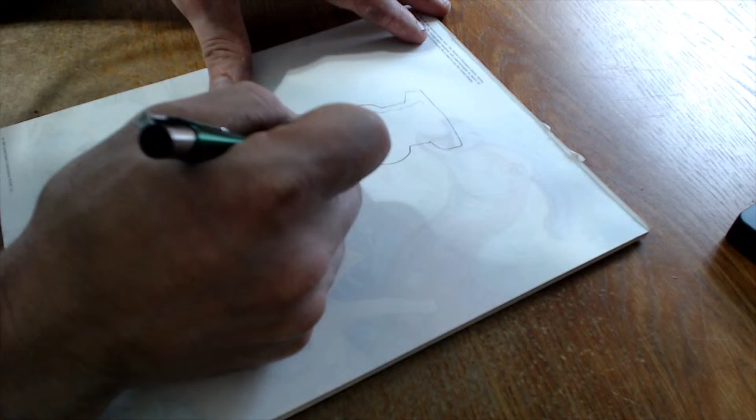And I actually had this idea of doing, let me just get this drawn, kind of a Matryoshka doll, a nesting doll of chess pieces, where we would create hollow pieces and then stick them inside of each other. And you'd take them apart, separate them in the middle, take the next piece out, separate it in the middle, take the next piece out. I thought that was an interesting idea. The problem is, there's a couple problems. One, I wasn't too confident in getting any good detail.

It's actually not that difficult to do regular chess pieces, with the exception of the horsey. There's my horsey. With the exception of the horsey, a lot of chess pieces can be made on a lathe, which means that they have symmetrical designs, generally speaking, which makes it very easy to do in Fusion, symmetrical and reasonably geometric designs. So most of the pieces, with the exception of the horsey, would not be too difficult to design in Fusion.

But I was thinking about printing it, because printing it is kind of important. And printing this nesting doll thing becomes extremely complicated, because your tolerances need to be really good in order to fit pieces inside of pieces. Like, if we're printing to scale, let's say this is a rook.

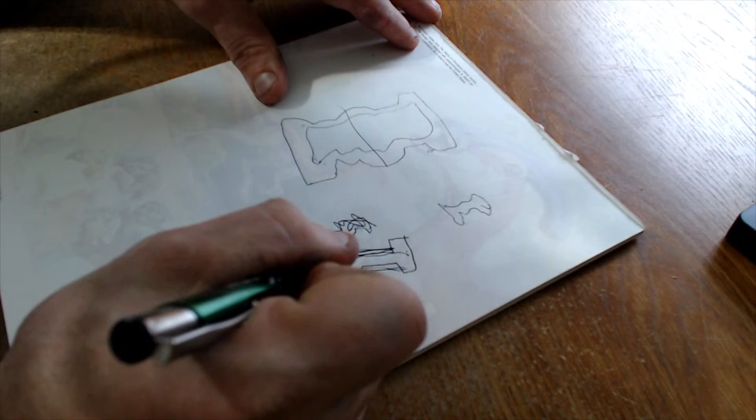Basically to scale, maybe a little bit wider here. So this is a little bit wider here. So if this is to scale, printing a bishop, let's say, inside of this, you see how much smaller that bishop to scale all of a sudden is in order to fit inside of the rook. So that's my biggest problem, and the reason I didn't end up going with this.

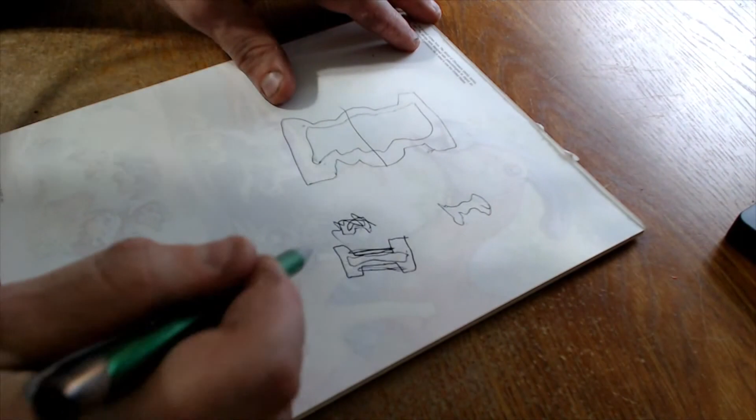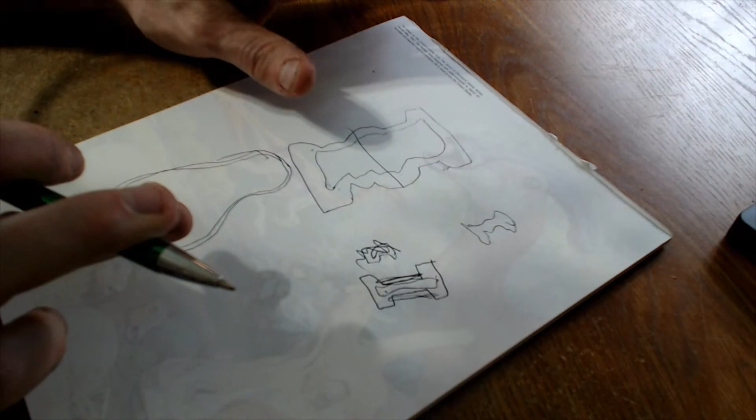The alternative that I thought about for a little while is actually making normal nesting dolls, to scale, starting about this big, and then because all the nesting dolls are the same exact shape, we don't lose as much space as over here, and therefore it becomes a lot more feasible. And because they're the same shape, we also have a lot easier time with the tolerances.

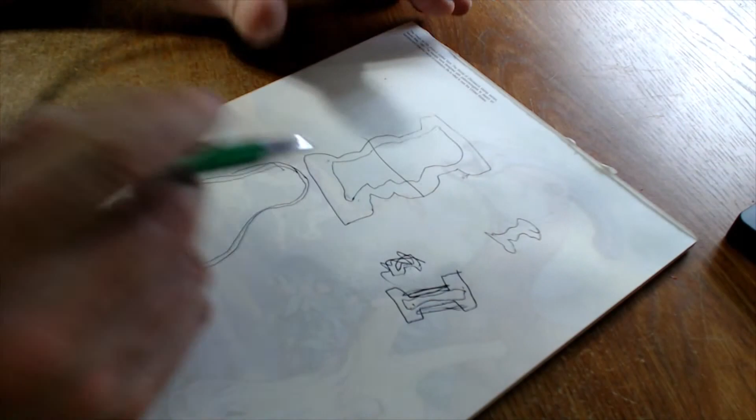So if we went ahead with a standard nesting doll shape and then just found some Creative Commons art, fantasy art, let's say, to inlay on here, extract the vector, put the vector into Fusion, and then extrude the vector, either embossed or engraved. Doing that in Fusion would be relatively straightforward, but it's also extremely boring, frankly.

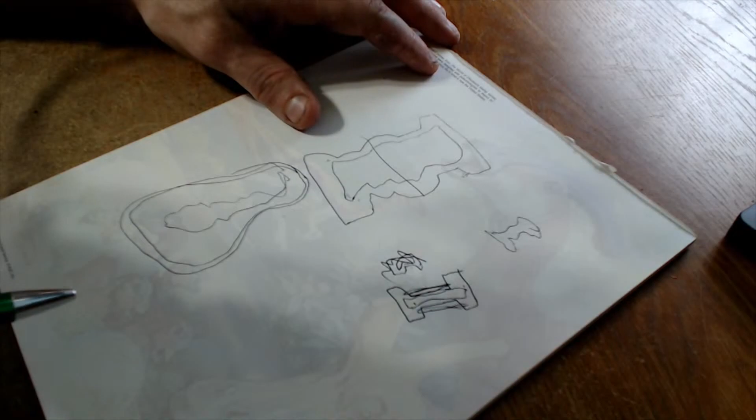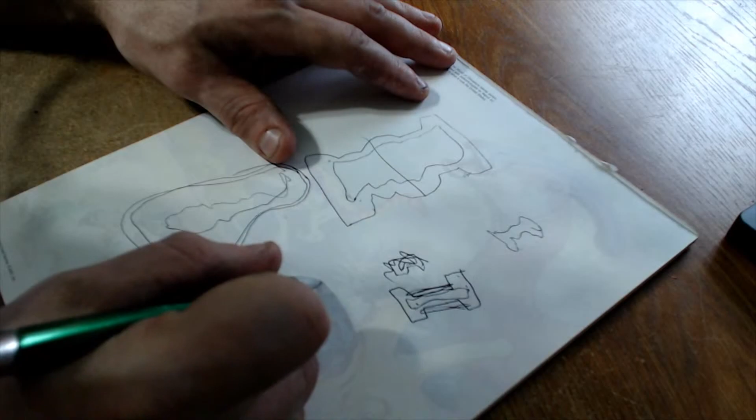I wasn't very happy with that idea, which brought us on to the next idea: if we don't think we're going to be able to nesting doll these, then, and this is my current idea, but I'm going to have to work it out, it's going to be a little difficult, instead of nesting them, having them pieced together so that our rook piece might intersect with the bishop piece, and the negative space in here might fit the horse, etc. So that's the general idea I think we're going with right now.

Again, trying to make something that stands out, that has some additional draw to it beyond just being chess pieces, because chess pieces in general, there's a ton of them out there. You've probably seen a ton of different styles of chess pieces. I don't like this mindset of we're at a disadvantage because of what we're trying to do. I'm not going to be terribly worried that people have seen chess pieces 1.5 million times before.

I'm going to be more worried about making something cool that actually works, because I've been on this puzzle box kick recently with the mechanical deck box, which is probably where this is influenced from. This idea of having interlocking pieces that come apart and go together in a specific pattern has been a theme in my mind for the past couple of months. I think having everything fit together in this pretty formation is an interesting idea.

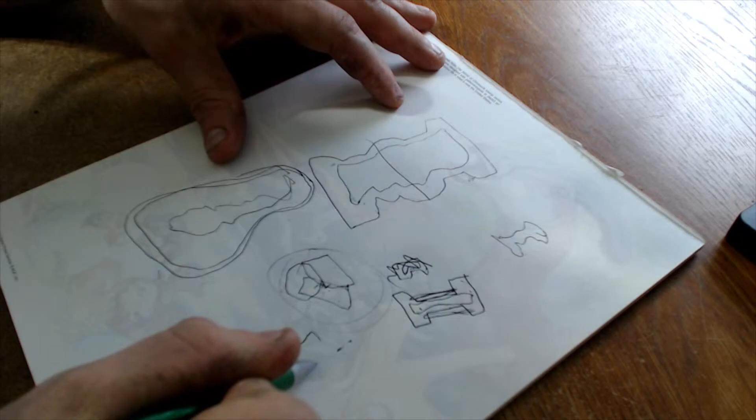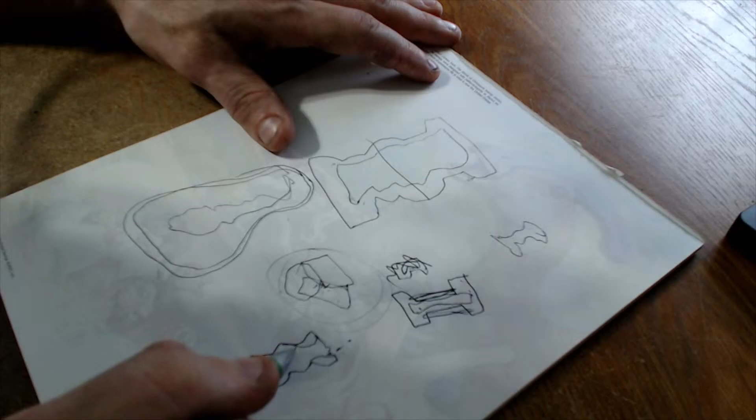Heck, if this design even gets to a point where the final form of all the pieces put together for a side is a king, that would actually be really cool. The horse is here, bishop here, rook here, etc. If the final form actually has some kind of significance to it, that would be really nice. I'm not holding my breath, but I definitely think we could at the very least have everything pieced together and, I don't want to use the term, market it as a travel set.

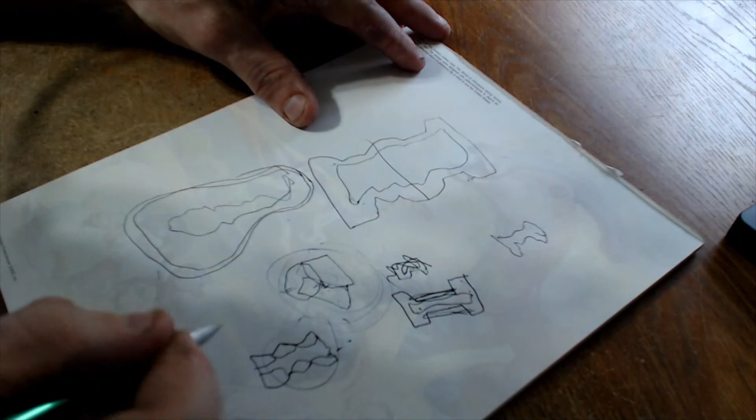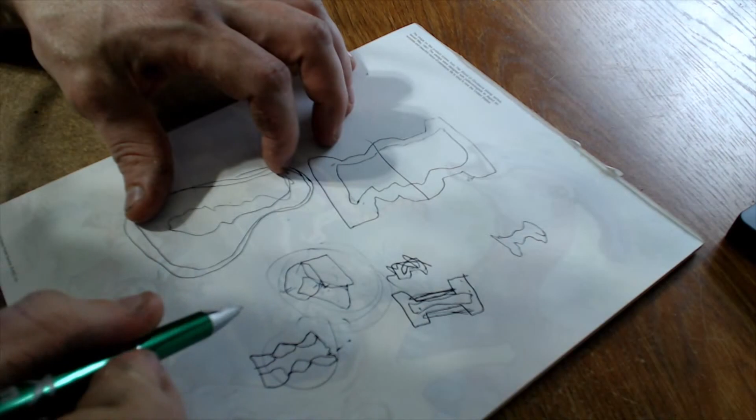The other thing I've been thinking about this morning before we went live is, because I'm doing a stylistically geometric polygonal shape, is there anything else I want to add? And I think it would be neat. If we assume for right now that all our bases are going to be square, I know bases are normally round, but round bases are significantly more difficult to fit together into combined shapes, so I'm starting out with square. Maybe we end up with hexagonal.

Let's say we have the rook here. Chess pieces generally have a base, an intermediate part and then a crown. Even the horse, the head is kind of the crown, a large bulbous thing on top. So since all chess pieces have this general geometry, if we can incorporate the piece's movement into that design in an interesting way, that would be very interesting to me. So the rook would be something along this shape. The bishop would have features that go diagonally towards the corners.

One of those things, just brainstorming here on the fly - the horse could be, maybe I'll overlap some shapes here, this kind of Y shape in all directions. I guess this ends up being more octagonal, right? 1, 2, 3, 4, 5, 6, and 6 is 12. So actually dodecahedral, or not dodecahedral, that's 20. I'm blanking on the shape of the 12-sided one.

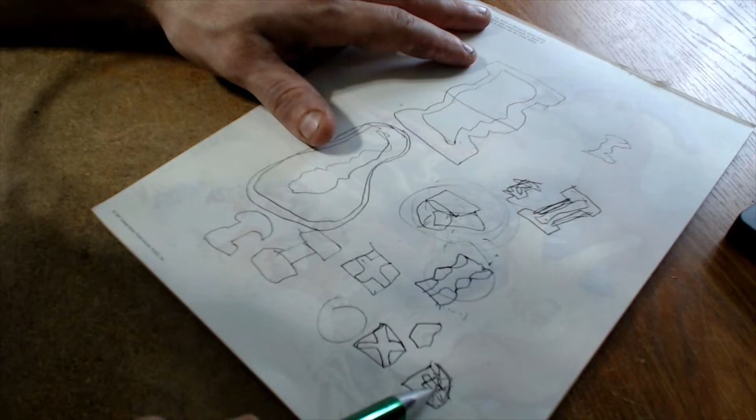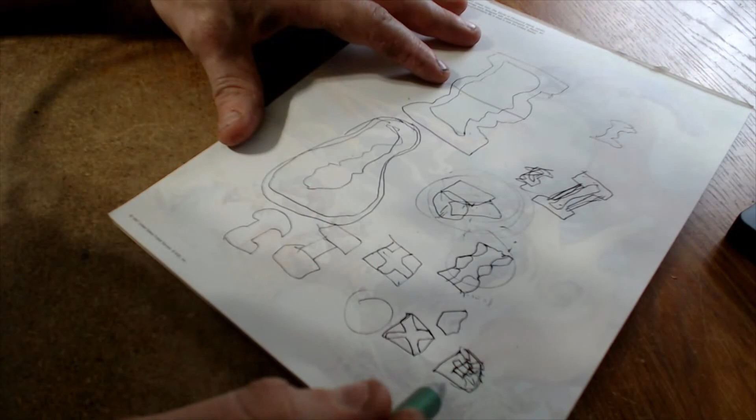That wasn't on screen, was it? We're over here for the record, sorry about that. So anyway, making a Y shape repeated circularly in order to get the horse's thing - that's one of those things I'm thinking we're going to go with. How it actually turns out, I guess we'll find out.

Let's go ahead and hop into Fusion.

Fusion, okie dokies. Haven't even saved the file yet.

Actually, yeah, I'm going to switch back to camera really quick. I know you guys see my file structure over here on the side all the time, but I'm still a little funny about that. So let's see - new project, chess pieces.

Let's start with - well, it's interesting because how exactly to save this as a file is another interesting question. I'm going to start with chess piece as a file, and we'll see what happens.

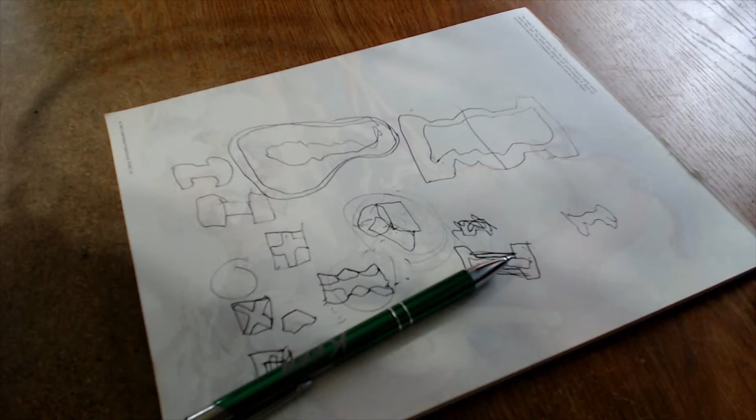Alright, so welcome back to Fusion. Grab some coffee.

Alright, so again, the general idea here is to use a square base. The reason we're using a square base instead of a circular base is because circles don't stick together as well. This base may end up being a hex - I don't know, we'll figure that out when we get there.

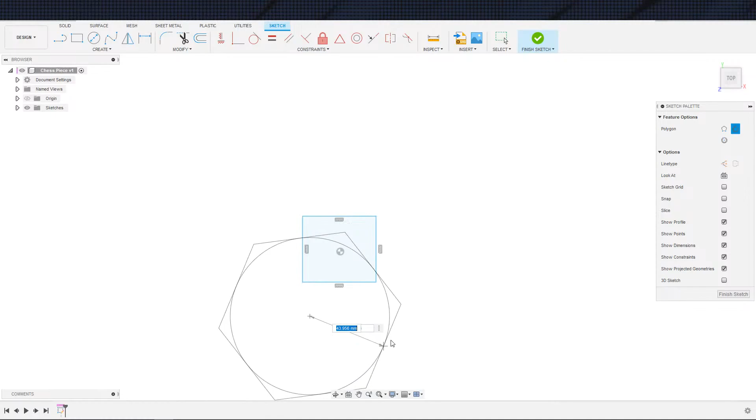One of those things that'll just take a little bit more thought to get there. So I'm going to rough out a chess shape here, and then we'll see what we end up with. Again, that's the point of these design streams - I'm just going to randomly throw stuff together and see where we end up.

And by randomly, I mean in a very skillful and organized manner, reflecting years of design and professionality. Yep, exactly. Let me open up the browser window really quick because I'm curious whether chessboards are generally 1-inch square cells. Let's see what this link says. Okay, so this one has a list of sizes starting at 1-inch square and going up to 2 3/4 inch square, basing that off the height of the king piece.

Let me mute my phone really quick. Alright, mute phone, mute. Everything, mute everything. There we go. Alright.

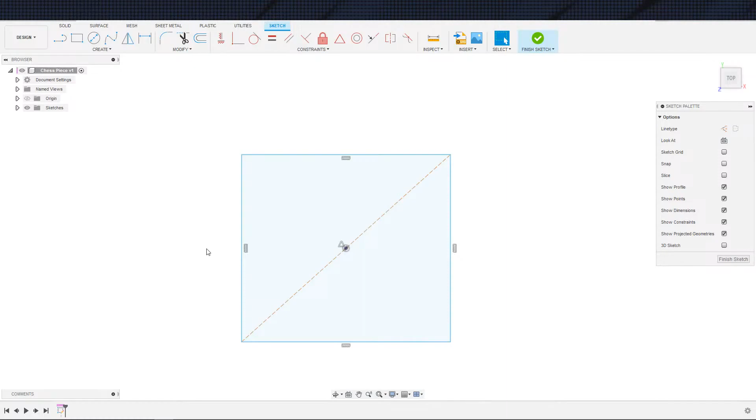So 25% less than - well, I'll just do 0.75 inch. Actually, base size equals 0.75 inch. There we go, and I will make this equal for right now.

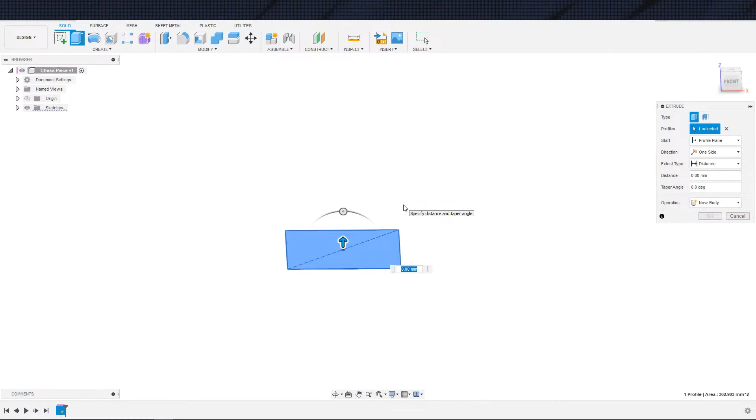And we can go ahead and figure out how thick do we want this. It's interesting, right? Because I actually don't even want to just extrude this up - I'd feel much more comfortable lofting this, so that's what I'm going to do right now. Okay, whoops, that was silly.

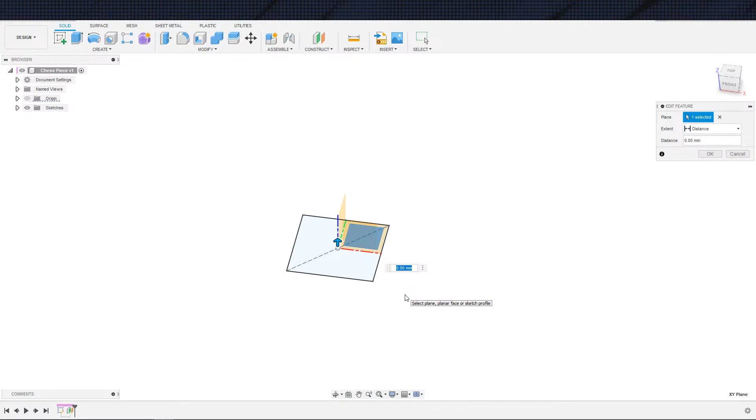Height on the base, though, I guess we'll start with 6 and see where we go from there. It may be - somewhere between 1/4 and 1/2 an inch is probably about right, so up to about 12 millimeters would be our maximum. If we start at 6, I'm happy with that for now. And for right now, I will just project and offset these.

Okay, project and offset. Okay, and then we'll do that. The offset - how much smaller do we want the base here? Let's go down to 1/2 an inch, so that would be 0.125 inch on each side.

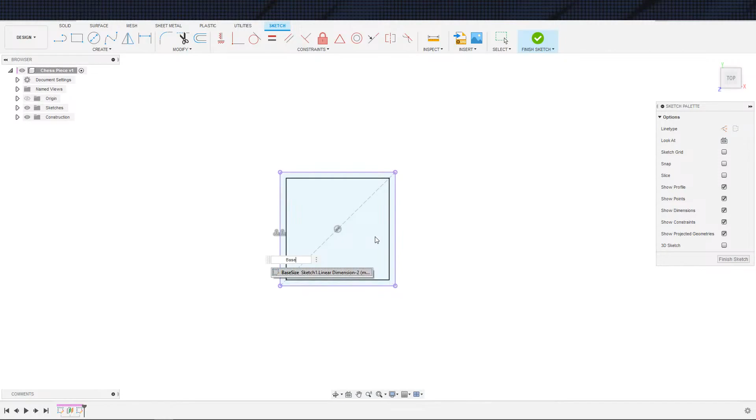And actually, base size times 3/4, or times 1/4 - quarter and quarter. Yeah, times a - no, all right, that is clearly not correct. Base size is 3/4 of an inch.

Doing math live on stream. So if I have 1 unit size and I want to reduce that by 1/4 overall, that should be 1/8 on each side. Okay, 1/8 on each side. There we go, that's much better, that's what I wanted.

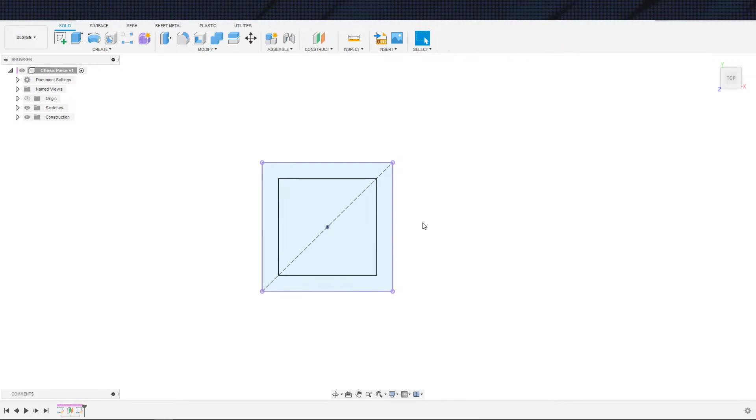Let's construction line these guys. Turn the other one off so we actually get the right ones. I hate when I can't double click stuff. There we go, finish, and now we loft.

Loft. And again, because all this is supposed to piece together, this may change here, but it at least has us started. Let's switch over to white plastic.

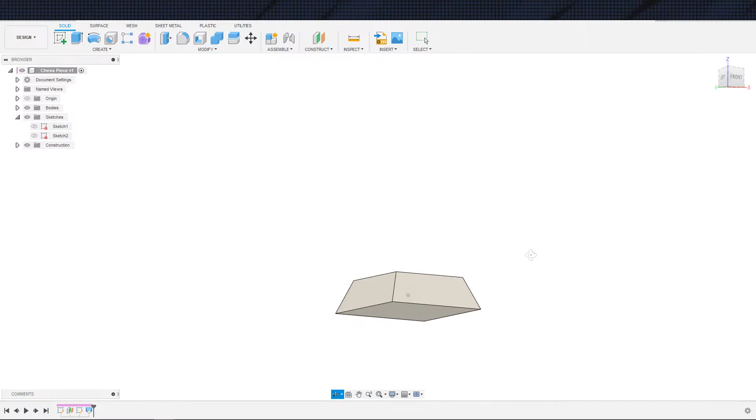There we go, cool. Hopefully you can see that just fine. I can see it fine on my end, but I realize the background is white, and this, even though it says white, is more of a grayish beige, or just gray. So I could understand if you may not be able to see it terribly well.

So let us save this, okay. And let us derive it for right now.

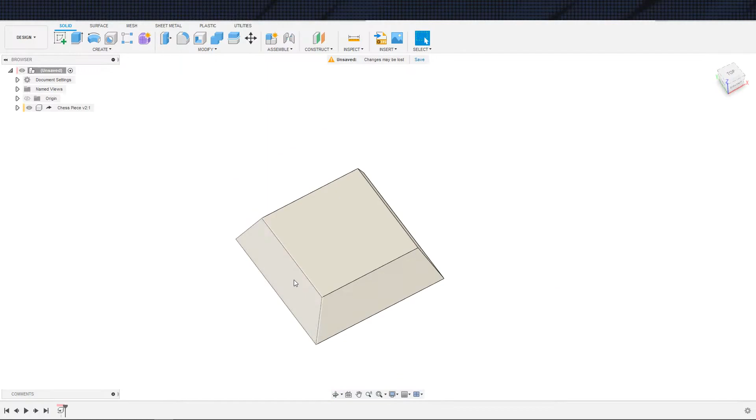I'm not entirely sure, because I've only spent a couple hours now thinking about this, how we will go about piecing all these together. So my first thought, my first inclination, and actually let us...

Instead come in here to this construction plane, and I'm going to rename that for the future: top of base, base, top of base. Still not entirely sure, since I only just started thinking about it, how exactly we're going to piece these together.

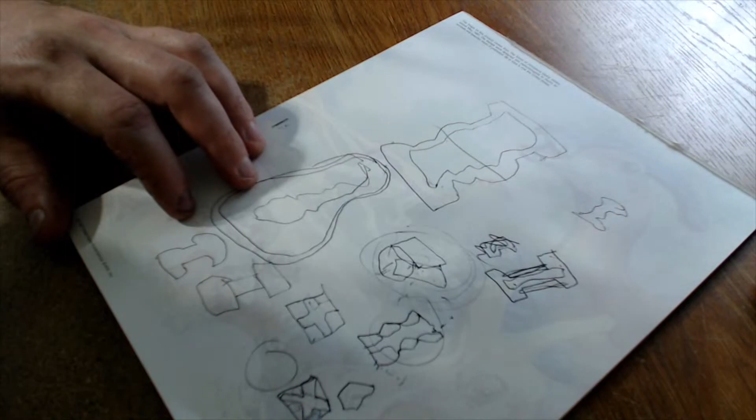One thing I do recognize is, let's hop back over the camera really quick, if we look at the rook and the bishops, right? This is a simplified version, but if we stylize this, these segments do not overlap on these two. So if we cut out the middle part, then in theory the rook pieces could be something like this.

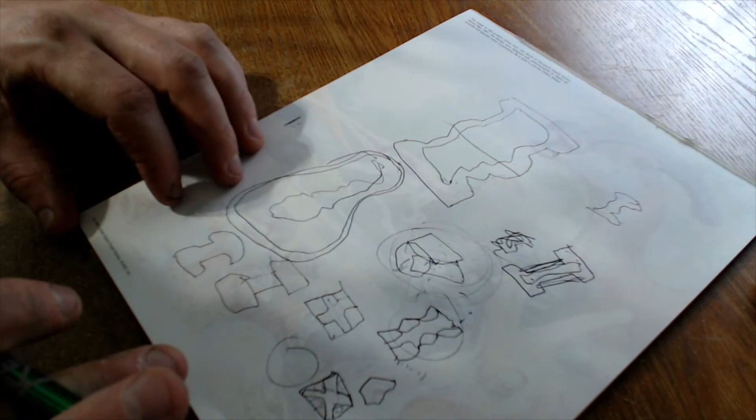So that is at least one way in which the bishop and rook could go together. The problem is incorporating everything else into one solid block, because if we just put the rook and the bishops together, they don't connect to each other either. There's not an obvious way that these pieces then mesh with other pieces, since these features complete themselves into one solid block. So there's no place for the other pieces to piece in, and that's what we're going to have to figure out.

So let us see. I guess we're drawing the rook first. Again, we will start out with this, and then we'll see where we go from here.

So let us call all that construction lines and turn the body off. Then we're going to make these square for right now. We may change our mind and decide they should be a different shape. For right now, let's Control Z.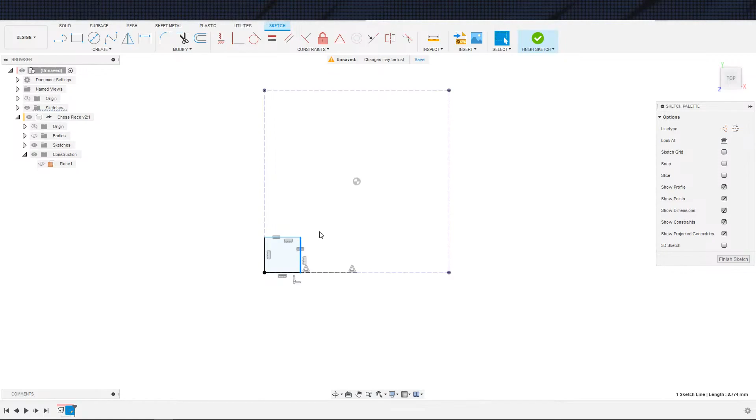I'm going to do what I've done many times before here and use lines to demarcate halves and quarters, and we will have this intersect the quarter mark. So this will be a quarter long, and if we make, actually this would be the bishop. This would be the bishop because this is in the corner. So we're doing the bishop right now. Pretend like you never heard me say rook.

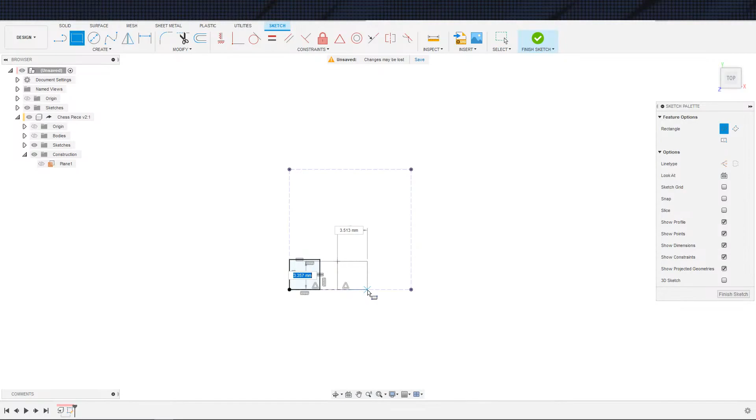So right now we are going to end up leaving, because if this is the rook, that would be centered. Well, this would be centered here. I'm going to go ahead and equalize this really quick, just so we have the same scale.

So we do have a little, if we use a quarter of the unit size here, and a quarter of the unit size centered here, that leaves us an eighth of the unit size in this gap right here. I mean, assuming that my math isn't foobarred.

That's a quarter, that's half a quarter, okay so this is an eighth. Yeah, that should be an eighth, because a quarter would be from here to here. So yes, that should be an eighth of a unit size right here, which is a space we may be able to use for something else.

So we may be able to piece something else in here. That is why I'm going with a quarter instead of bringing this all the way to the midpoint. At least that's what I've just decided right now, at any rate. That's my decision process right now.

So let's go ahead and extrude this guy up. Bodies. And looking over, it's saying 2-inch king height. I don't know if you'd expect the king to necessarily always be the highest. I feel like I've seen chess sets where everything's basically the same size, with the exception of perhaps the horse.

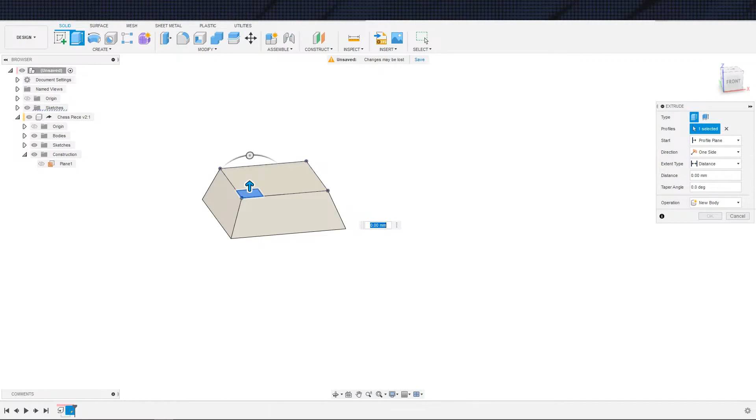So we are going to, from object here, go up 2 inches, and we will join.

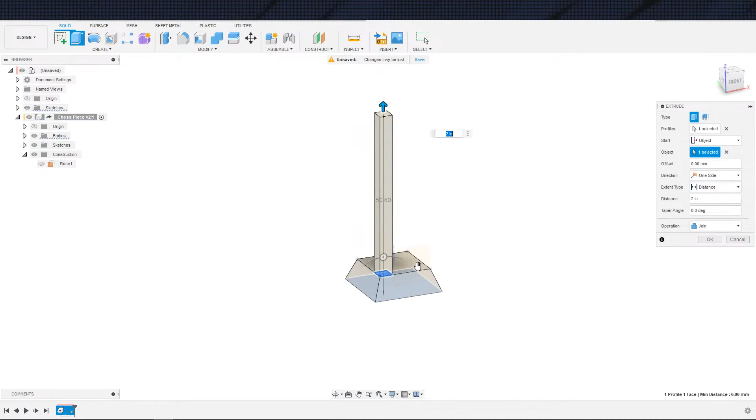So that is real lanky, comparative to the base. We may want to do something with that, but this is at least a start. We'll look at what we want to do with this going forward, especially because if we look at this, actually this is probably like 3.5. I was going to say 4 millimeters. 4 millimeters is kind of thick.

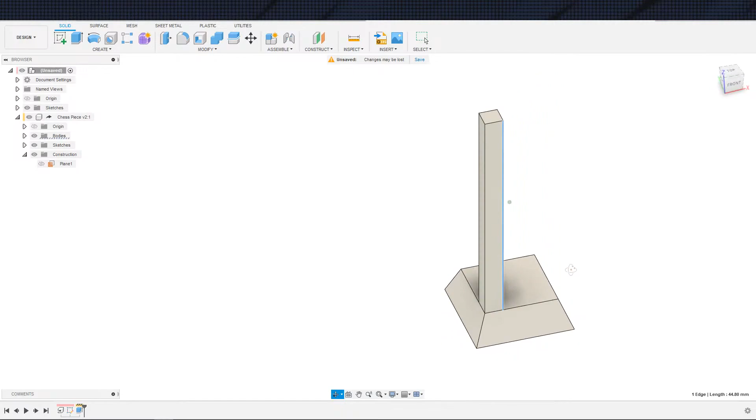3.5 feels a bit thinner and more prone to breaking, is where I was going with this. So we may want to make changes. For example, this base, if we widen it out, this 3.5 would then be more like 4. The thing we're concerned about for the moment is that it feels very breakable, especially since it's probably going to be printed in this orientation. If it's printed in this orientation, then the layer lines are directly in line with that, and therefore they want to snap.

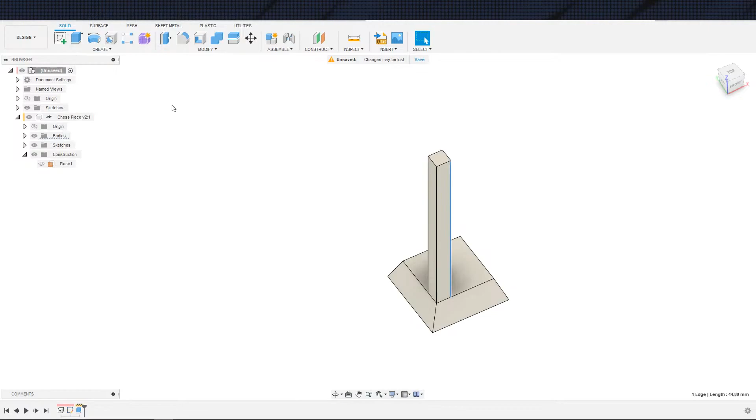So that does that, and let's see. How do we want to go about this? It's one of those things, in square shapes, you don't really... I wish there was a better way than just mid-planing all this, is where I'm getting at here.

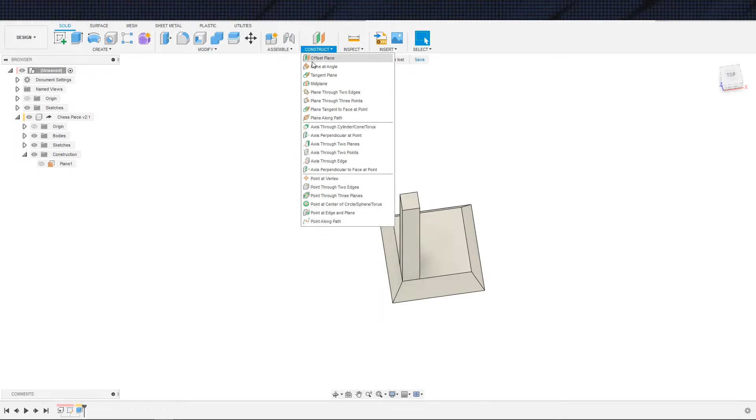Actually, I don't even necessarily need mid-planes just because the piece is centered on the origin. I prefer to have mid-planes, but to set up mid-planes, I'm going to have to do plane at angle here, here, here, here, and then mid-plane all the planes at angles, and that is just way too many planes in my opinion.

Honestly, it's one of those things. Who cares how many planes you have? The computer doesn't particularly care, so it's not necessarily a problem if you would like to, but I'm going to declare it a problem myself.

That is not the correct feature that I wanted. And again, I guess we just leave it on adjust because that's what Fusion has decided is appropriate as a default.

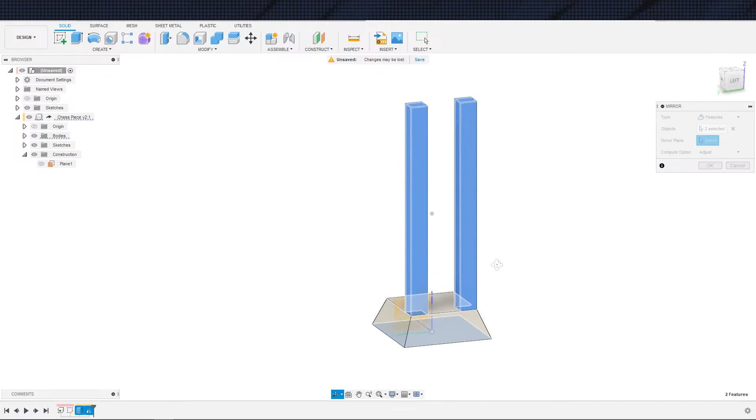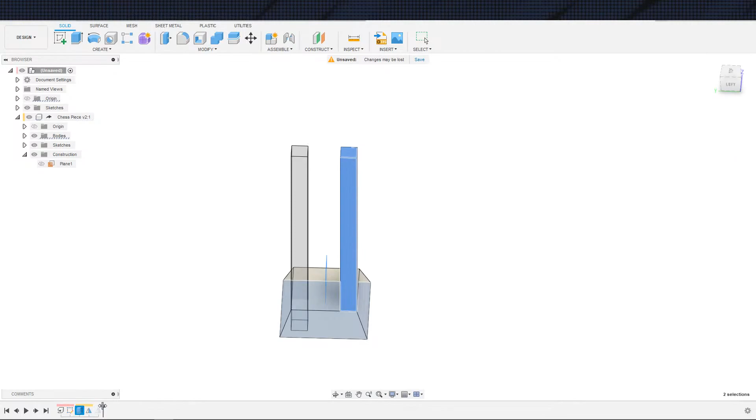Alright, so here is a rough approximate of our bishop piece. I do want to add more features, and we will be able to roll back in the timeline here. I can roll back into this timeline, add features to this leg, and then simply select multiple features, select all features before this mirror point, and same thing over here, and that will propagate the changes forward. So we are safe with that right now.

So let me go ahead and save this. Bishop. And we will, actually, before I save that, I should have saved this guy, because now this is going to complain. So let's just update that really quick. Save, okay. And let us derive another piece.

Okay, and this will be the rook like I was talking about before. And we will make those construction lines first. That way I don't get so annoyed. And actually, that is the interesting dilemma there.

Yeah, okay, let's hop back to chess piece. We are going to roll back and change things significantly. So let us change parameters. And actually, no, don't change parameters.

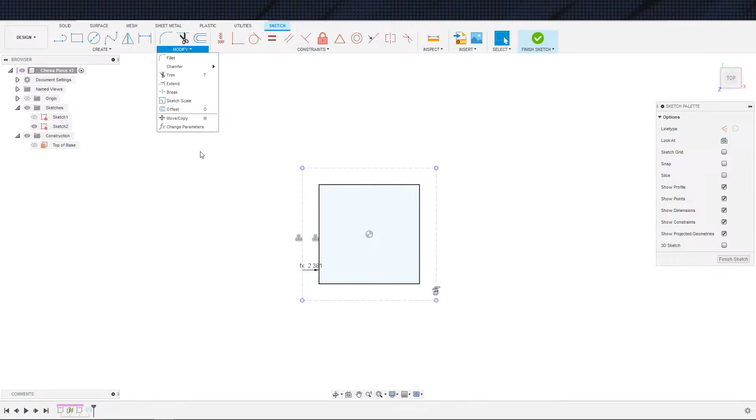Come in here. And we will do base offset equals. We'll do that. And then now we will finish, modify, change parameters, and then come in here: user defined top of base. I don't particularly care that it's in millimeters when everything else is in inches.

And this will be base size minus 2 times base offset, and that will give us the top of the base's square size. Again, this works for right now because we're using a square. We will have to make adjustments here later on if we change it to a different shape. So let's go ahead and say okay, and I'm going to go ahead and favorite that guy.

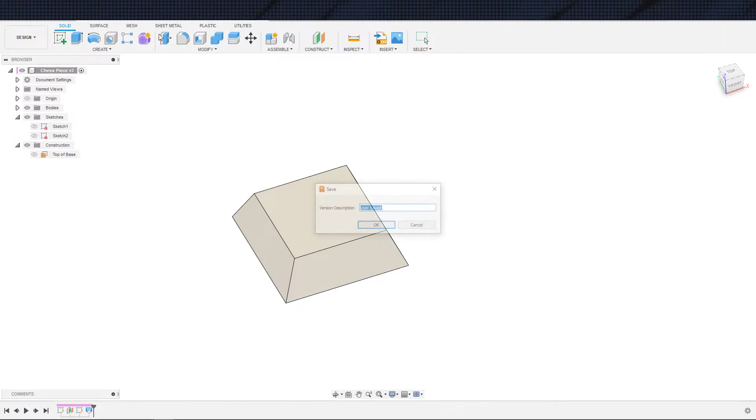And we can go ahead and save. And let's hop back into the bishop. I'm going to go ahead and update first, but I'm going to come in here and change this derive to include everything, all of it, for future use. And now we'll come back down here, and instead of having this based on these...

Let me turn this off really quick. I want the dotted line there. Alright, so I got rid of all the lines that do anything here, and now I can go ahead and do...

Actually first come up here to that and come down to chess piece. Nope. Chess piece, there we go. User parameters, top of base. Okay, top of base divided by 4.

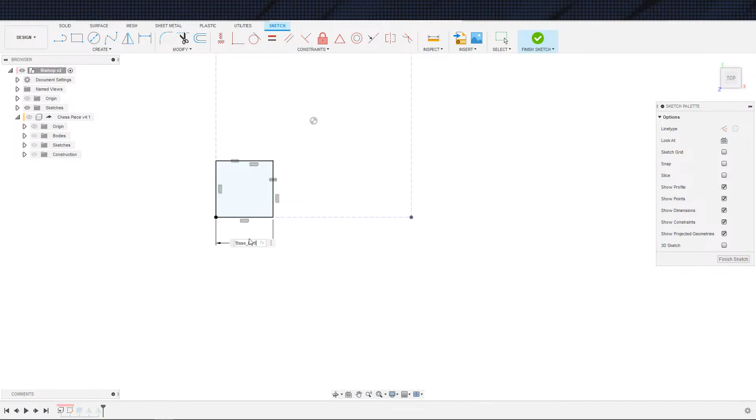We did 4 before, right? Yeah, 3.75. Yeah, so that's correct. All right. So now if we change the base, the top of the base size, so if that gets bigger or smaller, this bishop will automatically update to accommodate that.

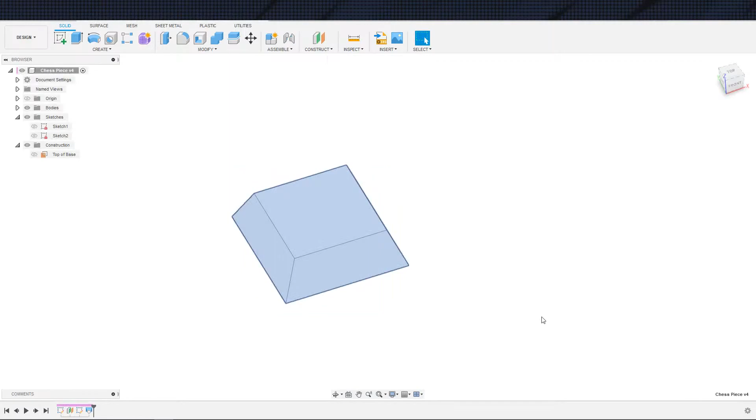And further, it makes our life easier over here on the rook, because the problem I was running into over here on the rook, let me just finish an update really quick. Update and make all those changes I just did for the bishop. So the problem I was running into over here on the rook is that, and sorry, I just realized I didn't have something up on my other monitor. All right.

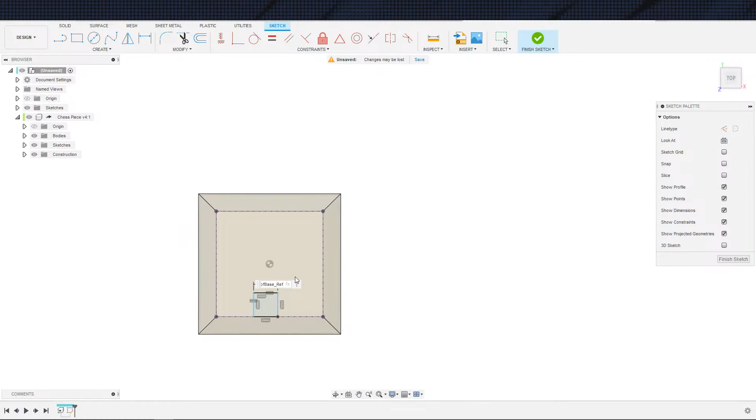The problem is that whereas the bishop, we could draw these lines in to determine what a quarter of the top here was, we couldn't do that easily, I should say, with the rook. So now, instead of having to jump through a bunch of hoops in order to get this sized correctly, we can just use, never mind, change parameters, users, and star. Okay. Top of base ref. Divide by 4. There we go. And now we are good. Just do that. Okay.

And then we are going to go ahead and turn the body off. Actually, next thing that I should do, and we didn't do before, is add an overall height. And I will change this one to 2 inches just because. 2, okay. Save that. Come back over to bishop, and we'll make sure that this is all uniform. And come down here. Where is it? Did I not just update the parameters? Huh. Where is my overall height parameter? That's updated. We hit the update button.

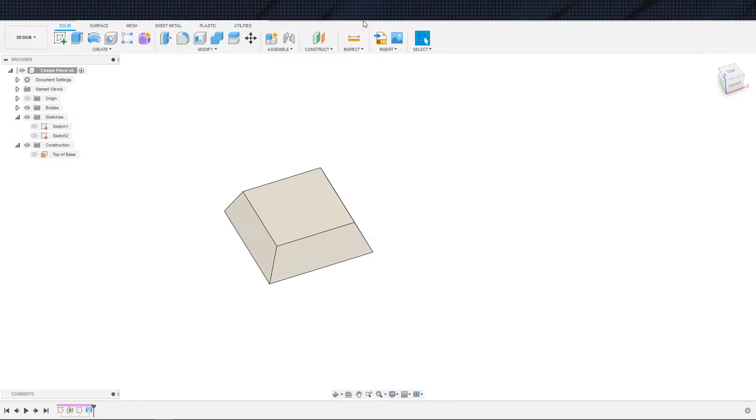Did I not save the parameter? Oh. Gotta star it. I forgot about that one. My mistake. Alright. So now let's update. Change parameters. And then star it. That is one of the more obnoxious things about parameters, in between having to star everything and having a bunch of underscore ref, which really should not be the case. There really should be scoping. You should be able to navigate through scopes. Unfortunately, that is not how the world works, so we're just gonna have to deal with it.

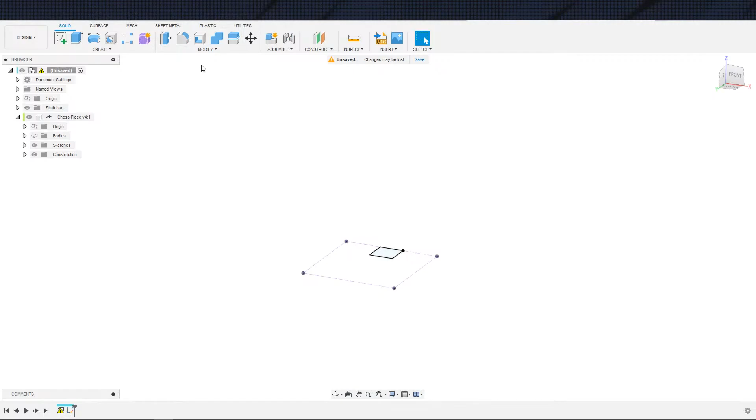Overall height ref, and now this is up to date, and we'll update if we have to change the piece heights. So let's go over here and get this guy finished off. From object, from the base, and our distance is overall. Oh. Update our links, go to change parameters, hit the star button, extrude bodies from object, and overall height dot ref. Whoops. And we got to make sure that's not a cut. We want to make sure that's a join. And now

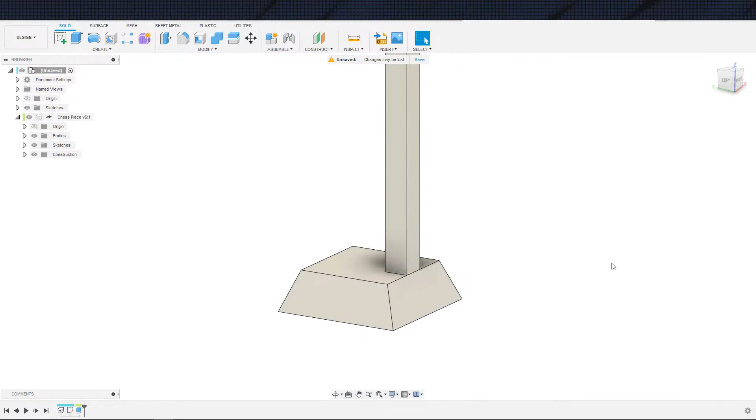So it's one of these interesting things, right? It wasn't going to work on the corner pieces, but for this one it should work. Circle pattern, features. Click that. Click the origin. And go to 4. And hit OK. Yeah, there we go. Funny thing that. Let me just hop back over here and make sure I wasn't going insane. For some reason I was thinking from past experiences that this wasn't going to work, which is why I mirrored everything, but I might just be insane.

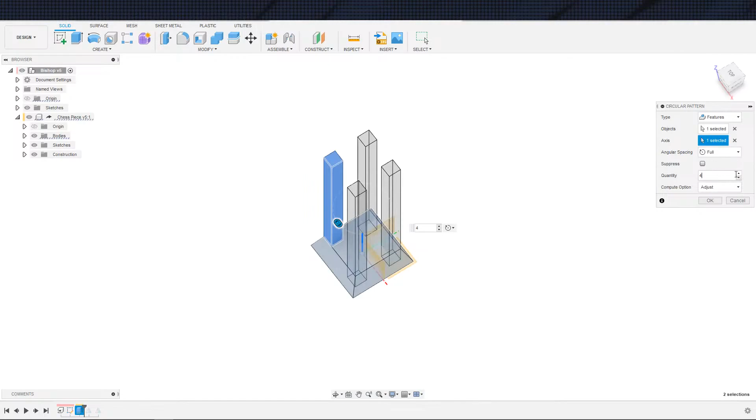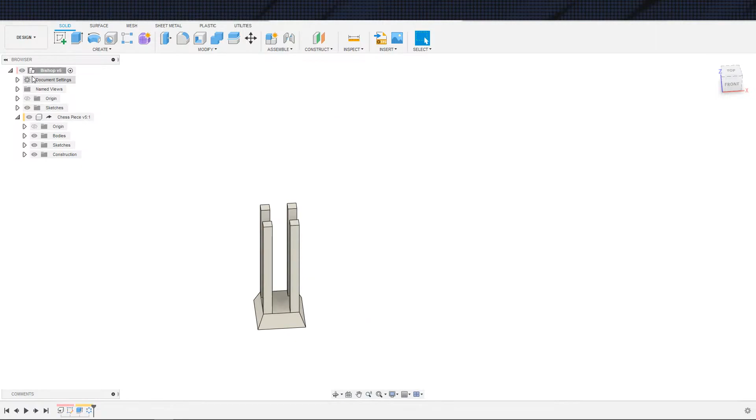Good. I wonder why. I swear the last time I went to circle extrude something like this in a square shape, it didn't work, and I'm trying to figure out why that was. There's probably a reason for it, but I'll have to figure that one out later. Alright, saved. Come over here, save the rook. Okie dokies. Yep, editables. Let us come down here and derive the next piece.

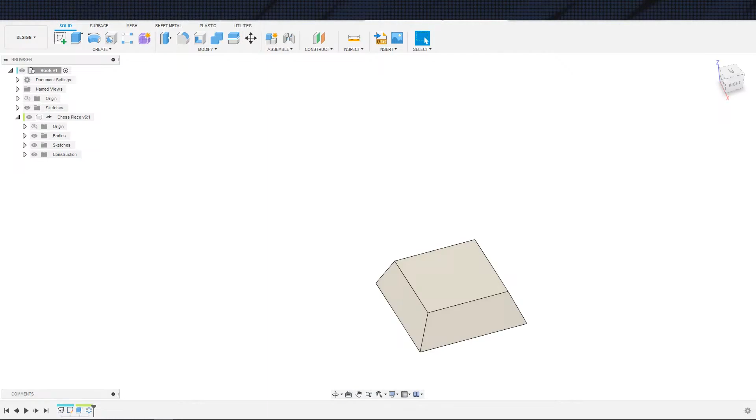And again, for right now, we are just getting everything set up. I still got to, as mentioned before, determine how exactly we're going to piece all these together, and that may come down to making further modifications, coming back to these pieces and changing how they fit together later on. First thing I'm thinking, actually, I'm thinking more about this now, and because we have this center point open here, if we overlap the bishop, let's try to line this up so that you can see it more easily when I jump back and forth.

So since that center point is going to be open, that at least gives us, if we wanted to, space to put the pawns in there. We could make the pawns a different base, like straight up base, as in just make them low pillars if we wanted to, and then they could slide into that gap. The alternative that I was thinking, though, was that the king and the queen could piece directly through the center. We could hollow this out, put a hole in here, and then piece the king and the queen through the bishop and the rooks

themselves, although we have 2 bishops and 2 rooks, which means that we have 2 assemblies, and we can put 1, 2, 3, 4, so we have room for 4 more pieces, and that would be the, let me go ahead and hop over to camera so you can see how my mind's working.

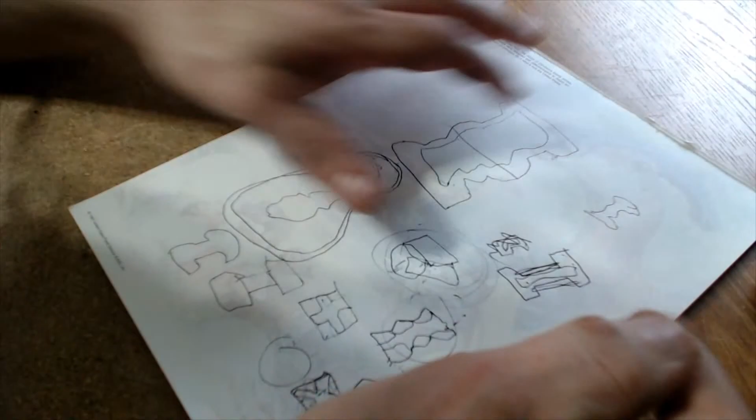So right now we have, I'm going to try to draw this orthogonally, or however you would say that. So pretend that this is the rook right here, and then we have the bishop right here, and this goes like this. Or actually, that probably should go like that. Okay, so here's the bishop intersecting the rook. I'm not going to draw the extra feet because they just get in the way.

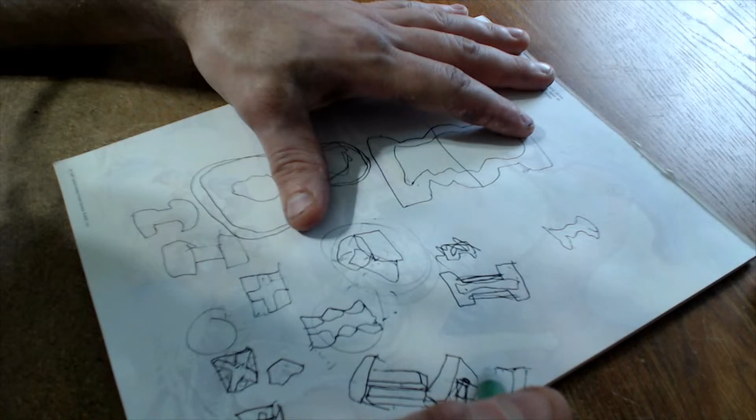We put a hole in here, and now the king and the queen, in theory, could be single pieces, but so long as the hole is big enough, and that might be a little bit small right there in the drawing, you could put the, let's say, queen through like this, and just imagine this going flush, right? So this then feeds all the way through, and the top of this base is flush against the bottom of that base. So that gives us a starting point for getting this all pieced together.

So that would be the queen in on this side. We could do the king in on this side, coming like this. How do I draw this? Yeah, you get the idea. So the king slides in this side, the queen slides in that side, let's say.

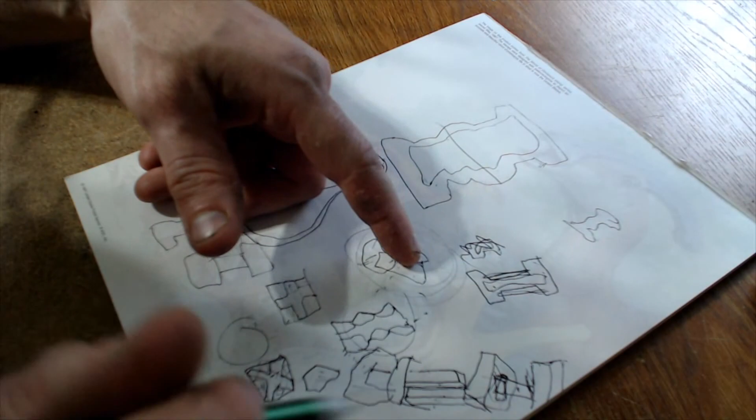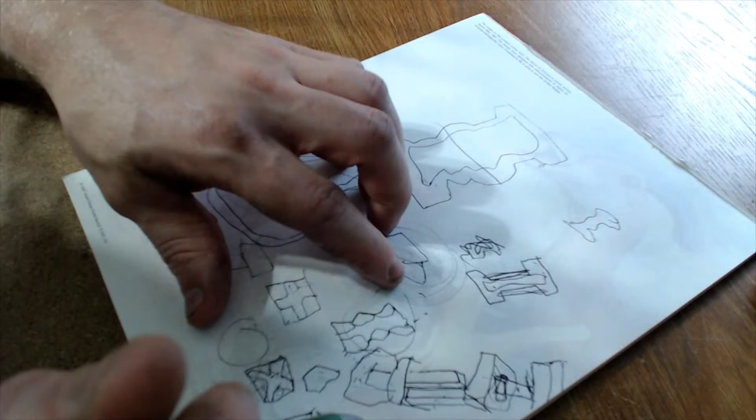And then we have now the knights. The knights would be the only pieces that we'd have to figure out for the other pair of rook and bishop, the black bishop, let's say, and the queenside rook. Then, so long as we design the knight so that it could do the same exact thing that we're doing with the king and queen here. The king and queen are easy because they're cylindrical pieces. The knights, though, as we discussed earlier, are generally weird shapes.

However, as my mind is working here, artistic style idea time. You know, if we made more of a snake-like horse, most people would pick up immediately that, because it's not cylindrical like all the other pieces, that could be the knight. Only problem with that idea is that our previous idea was to have the directions demarked by how the piece was shaped, and that becomes a problem with this knight.

So our knight, again, we kind of want to have making an L shape, and this is a problem in multiple ways because A, it's going to be a problem getting pieced into this idea that we have working right here, and B, it's going to have a hard time looking like a knight.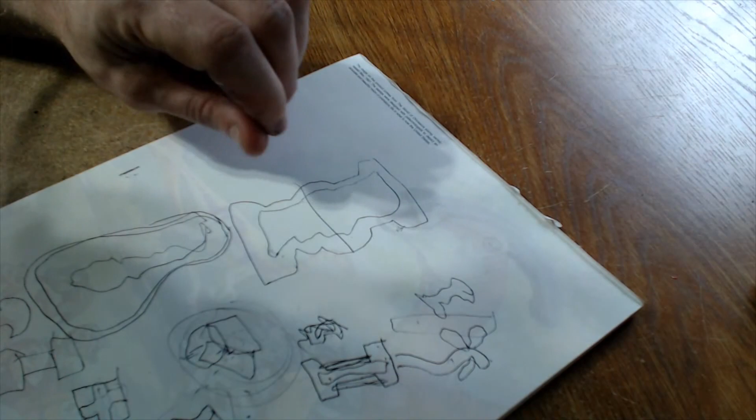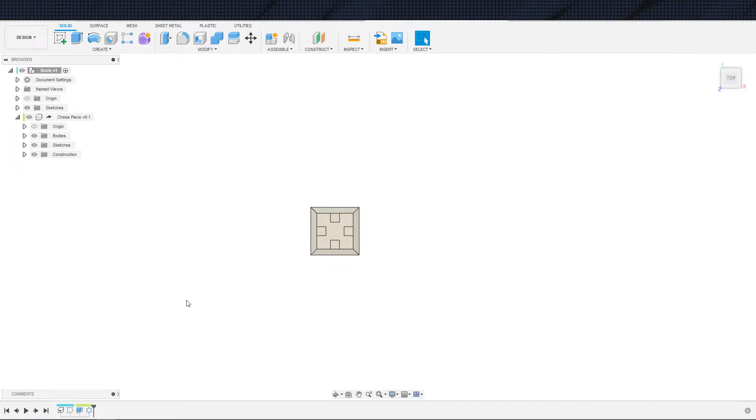Now, on the one hand, back to artistic merit and art being symbolic, if the pieces of art are supposed to represent things, then it doesn't necessarily matter whether or not the knight looks like a horse. If it reflects its movement, then you can say artistically, well, it is representative of a knight. So anyway, I'm going to hop back into Fusion now because I've drawn everything I want to draw. This is something that we're going to have to consider, and it is something that we may be able to solve as I'm thinking through this more and more.

One of two ways. First off, let me hop over to the bishop maybe. Yeah, I could probably do it here. So the queen and the king could, in theory, piece into just the bishops, is now where I'm thinking. Maybe. And my idea here is that if I use this whole entire space right here, so let me go ahead and just start up a sketch so that you can see what I'm thinking here.

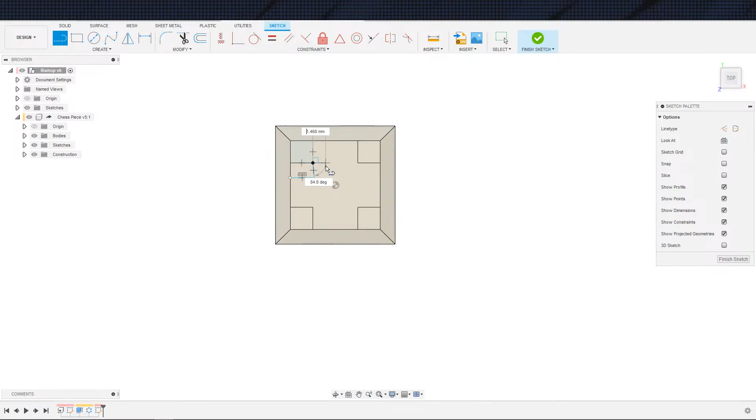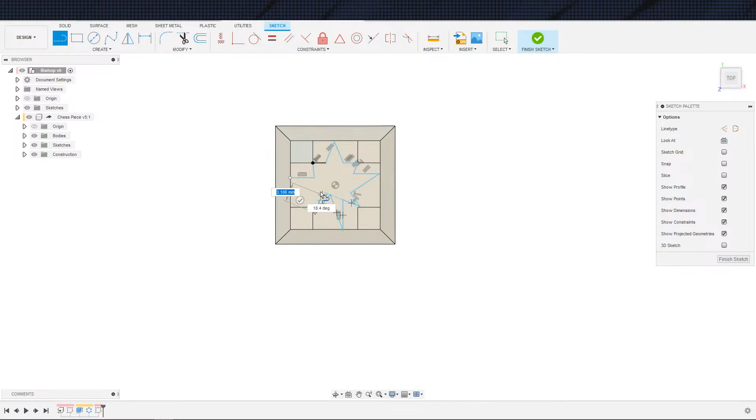Using this whole entire space, we could create a design that is something to the effect of this. So whereas the bishop and the rook are squares, the king and queens can be a bunch of triangles put together. And you see how I can use extended star shapes to go the cardinal directions, and use smaller star shapes in between for the diagonals. So the queen could fit into the bishop like that,

and the only question then is the rook, because the queen and the king could fit into the two bishops coming from the bottom side, as we were discussing earlier, because that dodges these pillars and it doesn't look bad. I mean, obviously my drawing right now looks a little bad, but once I get it properly defined, have dimensions confined, have it well designed, etc. Just keep on rhymes.

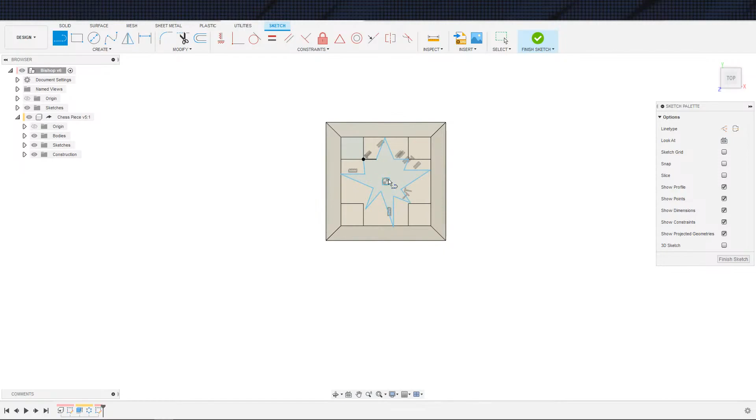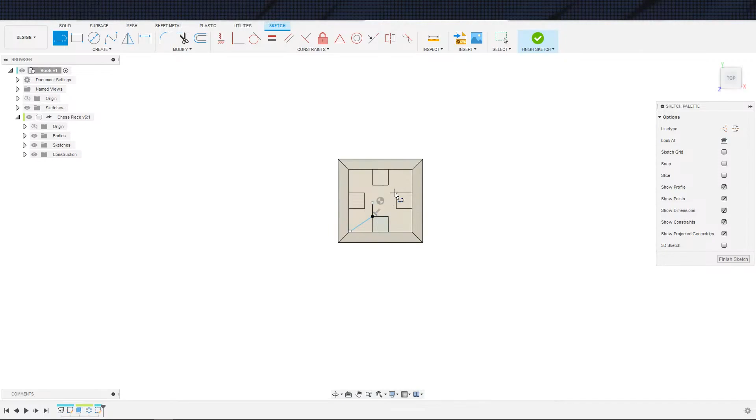King and the queen could fit into the bishop side. The rooks, then, you see how the rook actually, we have our diagonals here that we wanted for the knight. So the knight could look something like, come on, Fusion. Something like this, I'm thinking. So that's, you know, square. Here's my squares.

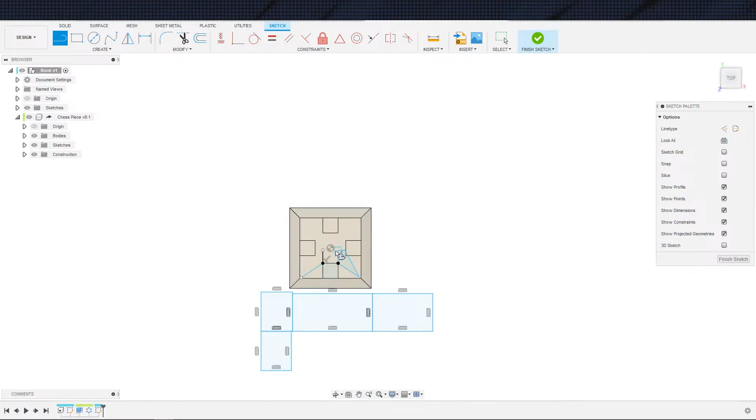So this right here, draw one more square here. This right here represents go one and then go diagonal, and then we'd have the other one over here. So this is looking to me like this might work here. That, and then go diagonal there. That, go diagonal there. It's looking like it's piecing together to me, right?

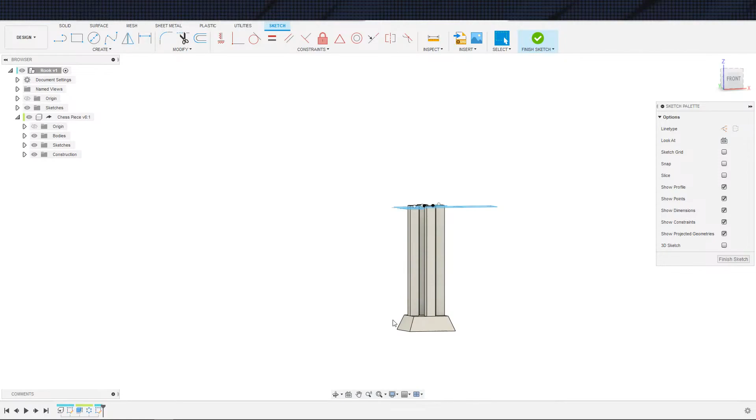This is starting to take shape in my mind, so I'm actually feeling pretty good at this point about these pieces nesting together in this orientation. Again, the 2 inches here feels way too unsafe to me. Now, the one thing we could do is, these are boring squares right here. We could turn them into triangles or octagons or hexagons, any of those things. And that would make me feel better about their stiffness. I don't know why. I can't exactly explain that. The square shape just feels more flimsy to me.

Whoa, sorry. Wrong pipe. One sec. All right. So, yeah. All right. We'll make those changes when we get there.

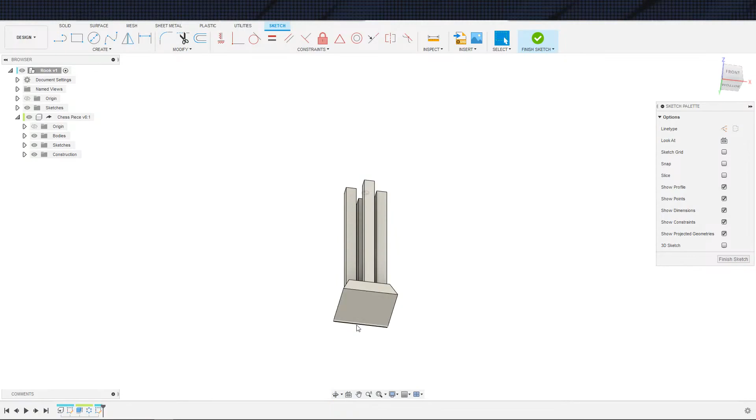The one thing that this does is, if each rook gets one knight and each bishop gets one king/queen, and those pieces all the way through here, then I'm not sure how the bishops and the rooks are intersecting then at that point.

Alright, basically what just happened there is I have trees getting cut down outside my room, and I was curious. I was watching the microphone meter, even though it was muted, to see how much of that you're picking up. You're picking up a good amount of it, unfortunately. Actually, let me tune into the stream really quick and see how that sounds. It doesn't look like it's terribly loud on the microphone, but let me just check.

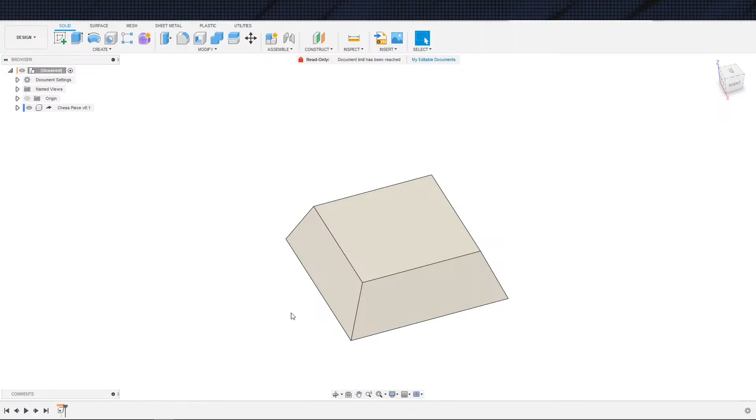So we've made a good amount of progress. Largely what's left, because we have a decent game plan of how to get these together, is connecting all these separate pieces and adding stylized features to all of them. That actually shouldn't be too difficult going forward. Since we have a good idea of how all these pieces are going to fit together, all we have to do is figure out how to get the pawns together, and then how to get these 4 sets of blocks put together.

And I think in my mind that they could fit together because there are 4 pairs of pieces. That 4 pairs of pieces makes a square, and then the connecting pieces could be the pawns, is where my brain is going right now.